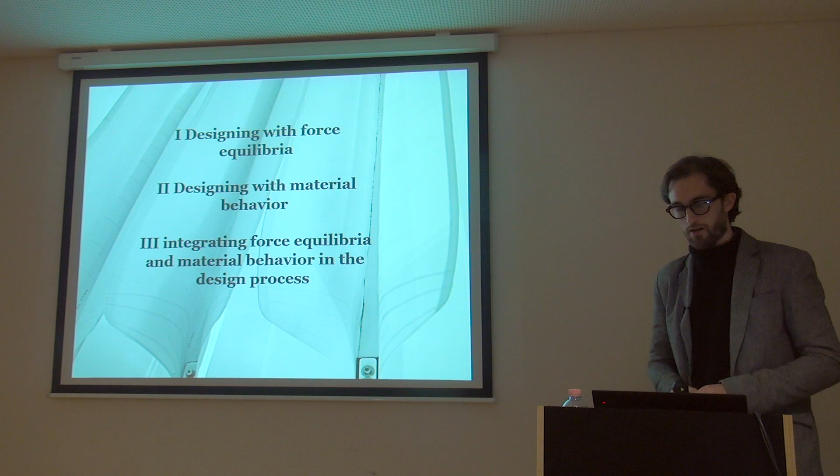And I'm going to divide it up a little bit into different ways that we approached the projects. Not so much in a chronological way, but much more in the way we approach the first design ideas and the way we try to develop an engineering system out of an initial design intention, and then let that become a structural system with some degree of efficiency.

So the first family of structures I want to talk about is very much related actually to the work that the IL and the team around Frei Otto was pushing as of the late 60s and was publishing in their many IL publications, which was often very much driven by a structural idea and how the physics of the problem can become form, and how that form then dictates the entire design of the system.

The first big project I was involved in at Bodo Rasch's office was the structural design of these famous Medina umbrellas. And we were one small unit as structural engineers in a very big design team, all working together on making this mechanical system work in an architectural context set in Saudi Arabia, having it work as a machine because it's a folding kinematic system, having it work structurally in the extremely high winds, and going into a dialogue where there were parts of it very mechanical, designing the kinematics of the system.

Other parts were heavily dealing with computation, where we tried to understand the real physics of the problem, as we were forced to design a system at a very high efficiency with very slender cross-sections. Because if you try to build a structure that's kinematic and folding, it's not just beautiful and nice to build it light, it's actually something that you have to achieve in order to make a package that can fold to a very small size. Because tube size, as for these cantilever arms, would be something that's very hindering as you're folding it.

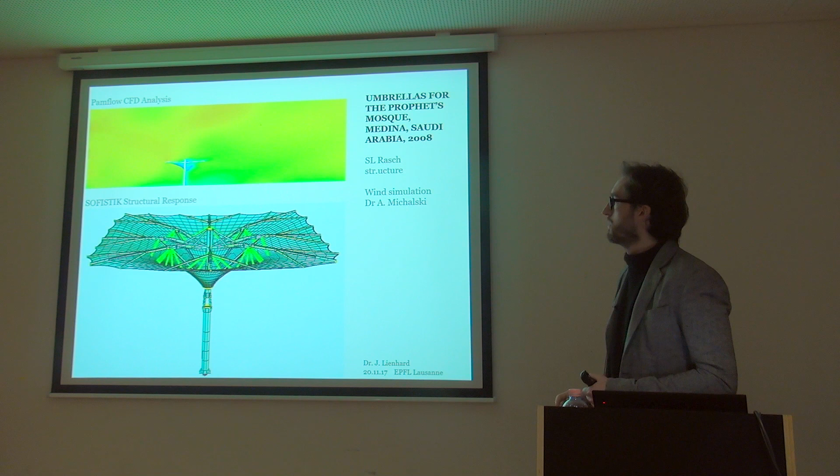And at the same time, as you can see here, the structure is actually moving in the wind, and there's some aeroelastic damping involved, and there's additional dynamic problems which we will not see in a wind tunnel. So in this case, and it's a fairly unique case, we actually need the computational wind tunnel with natural winds coming in and not laminar winds to analyze the structure in its true behavior, to then finally achieve something that is very lightweight and very thin in the cross sections, so we can fold it into a small package.

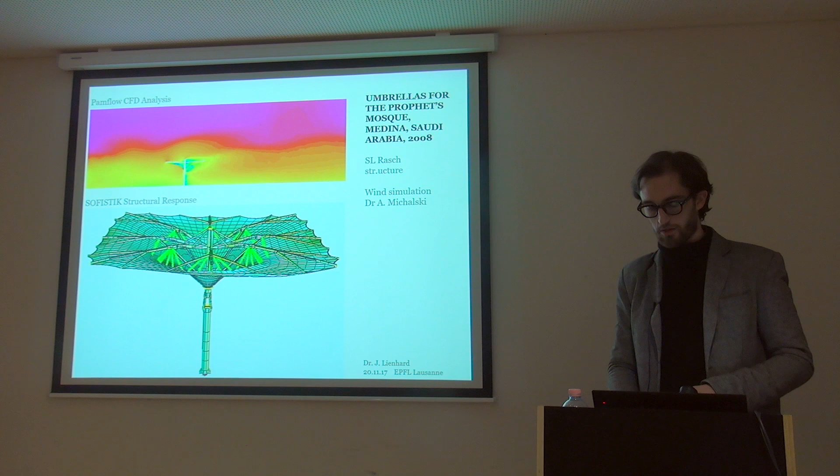There's obviously many things one can talk about with these systems. I'm just going to focus on one very small part, which actually kind of talks a little bit about this dialogue, where you try to make a very efficient design that's also informed by the structure.

So we're going to just focus on the edge of the membrane and see how there's these central arms and there's the large diagonal arms, and you can see how there's always these smaller arms that are attached to these main arms. We call these passive arms because they're not directly connected to the central driving system, and they just passively fold out as the umbrella unfolds.

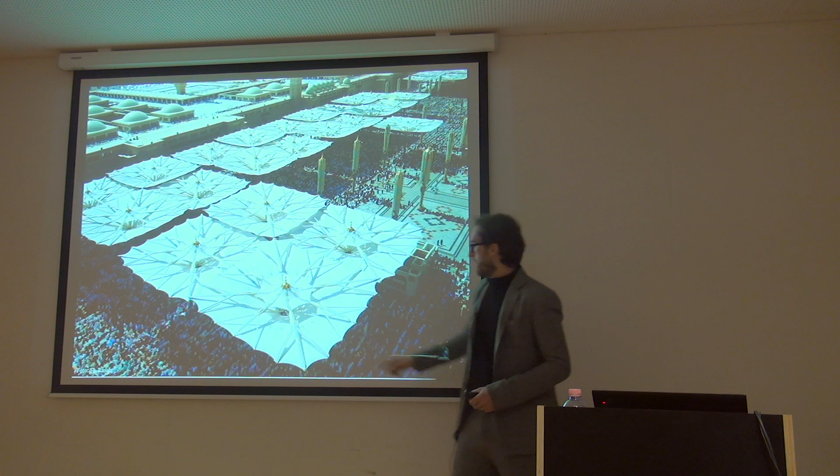And to do so, they're hinged here, which then means if they're attached to the membrane here, we have to make sure that the normal force that the membrane puts into the end of the arm has to be perfectly directed into this arm, so it finds a local equilibrium here. And if you look carefully, you will notice that the edge of the membrane, the curvature actually changes. So there's a structural information that's not hidden inside the shape of the membrane, but that's actually quite visible.

And you can see how the edge cable curvature actually decides on how big the force is in that edge cable, and how this radius is much smaller, which leads to a smaller force. And then this is something that I'm sure all the architecture students here learn a lot about, the force equilibrium, and you can then see when you add up these force vectors how you're perfectly pointing in the direction of the arm.

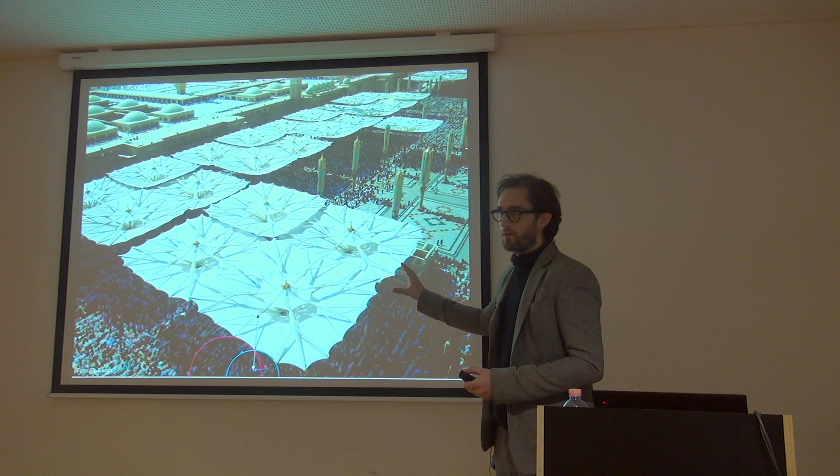And this is actually something that is very much in the DNA of all this work, that there's an information about the force equilibria that's inherent to this entire structural system, and that becomes visible if you carefully look at the shape of the system.

So basically, if you break it down into the theory, you can see how adding up the force vectors at the edge of the membrane, you can dictate its direction. And then by playing with different radii on the edge, you can control where the forces are going. And this is something we cannot hide. And this is something we never wanted to hide, because we were very much enjoying this dialogue between creating a shape that works in terms of a shading system, but also structurally.

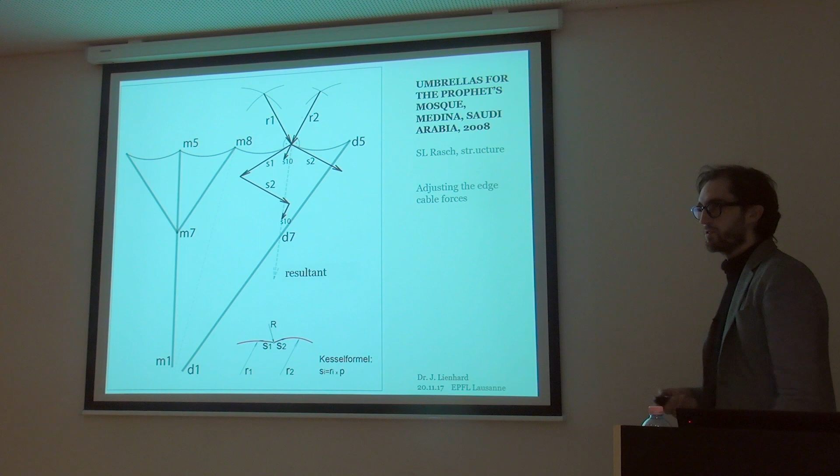And this is a kind of approach to work which happened inside Bodo Rasch's architecture office, where people were actually sitting together in one place at one table working together, which made this approach possible.

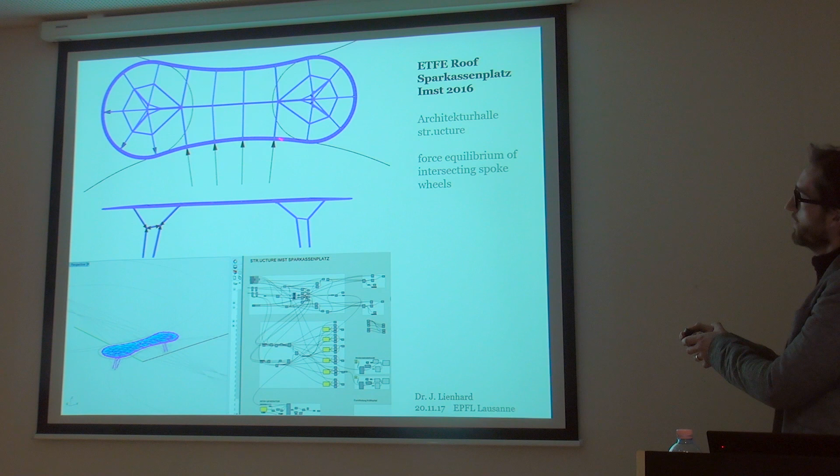First of all, again, we started by equilibrating the geometry through a very basic force principle by designing the floor plan in 4 intersecting spoke wheels. So you can imagine that these are 4 independent circles that meet at their tangents, and we aligned the entire inner structural system with the radii of these circles.

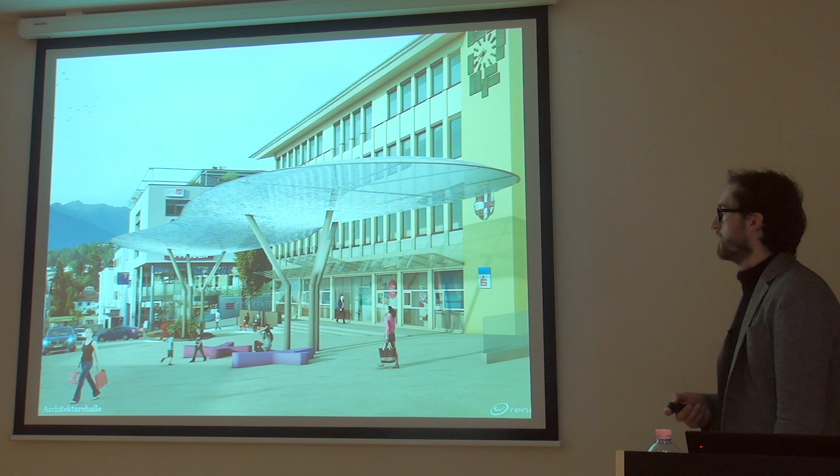Very basic principle, which you can then set into a parametric model. And at the same time, these bifurcated masts were also based on a force equilibrium. And so we had started the design by designing a force system, which we could then hand back to the architect, who then designed the structure in itself by simply changing the radii and the heights of the bifurcation points in the system. And we knew whatever we would get back is something that's somewhat structurally informed and will lead to a primary steel structure which should be fairly sound and stable.

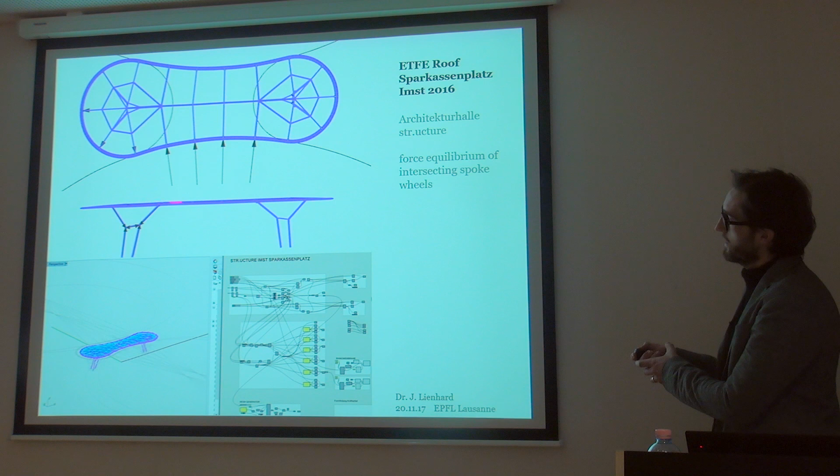What you can also see is that in section, the structure is flat on the underside and slightly elevated towards the center. So our idea was that we build a structure that passes through different phases. So we have these ETFE cushions that are additionally supported by a cable net. And then on the inside of the structure, on top of this elevation, we put an additional cable net, so we can allow for controlled collapse of the cushion, and it's still at an angle to the outside and can still drain water to the outside. So we expect this cushion to collapse and sit on this inner cable net.

So you can see here a multi-layer system. We have the lower cable net, ETFE cushion, that bifurcated inner steel structure, a cable net that carries the high snow loads in winter, and then the ETFE on top and another cable net. So it becomes a kind of hybrid system that goes through different phases.

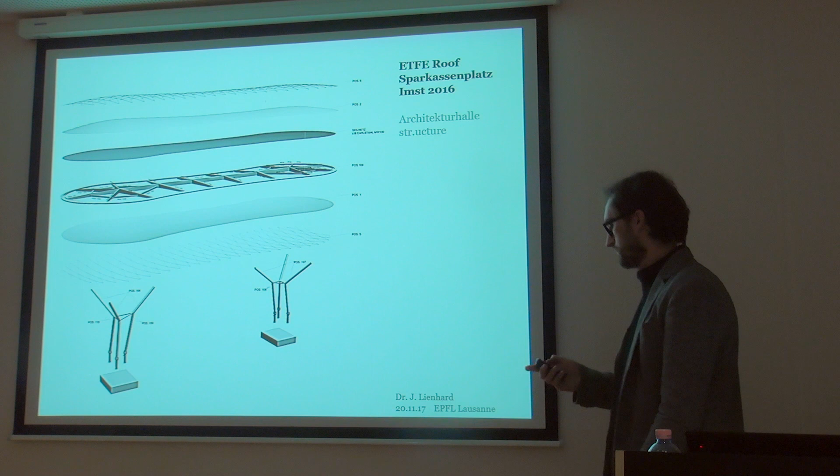A result of designing the geometry totally based on forces is that at the point where you then have to detail it, you're obviously also looking at a system that doesn't perfectly match in right angles, but that has maybe some very odd geometries that you have to resolve. And rather than seeing this as a problem, we actually defined this as the main challenge of the system, where we wanted to really show that everything is aligned to the tangents and to the flows of forces.

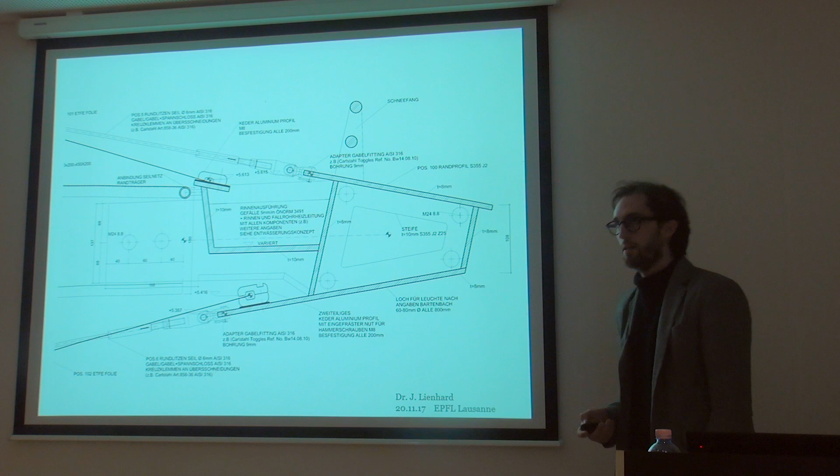So we designed the edge girder in a way that it picked up the resultant directions of the cable net and had an integrated rain gutter system in it, which then drained through the inside of the cushion. We wanted to have no air ducts or water pipes seen on the outside. So that created the next challenge, that the bifurcation points of the central masts had to remain hollow so we can run all the tubes through it, which we then realized with these steel cast nodes.

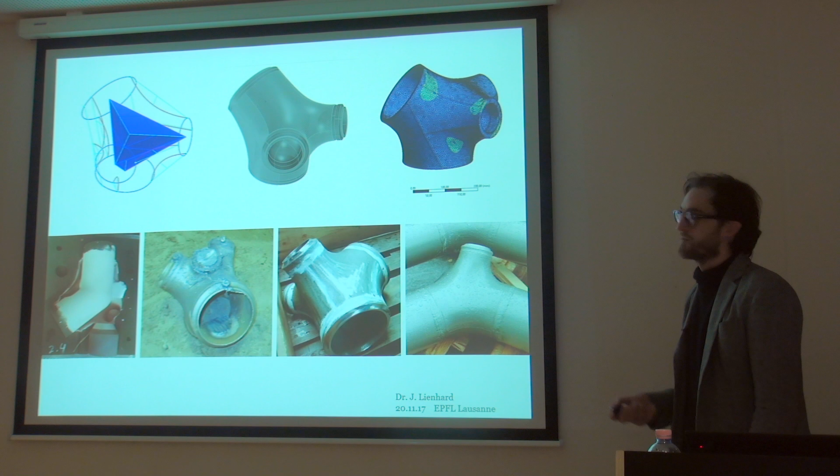Something very interesting is that actually it's fairly inexpensive to build these steel cast nodes nowadays, because we can 3D print and sand the casting molds for it. And actually the most expensive thing for us was to design a perfect surface of these elements and to design the 3D solid model that then goes into the 3D printer. What happens afterwards is actually fairly standardized steel procedures, and they don't care whether they get 6 different nodes or 6 of the same nodes, because they anyway have to reprint the molds every time.

Something that we often aim for, and this is really much the Stuttgart engineering school, is that in the details of the structure, we always try to make things look as minimal and as obvious as possible. So the way we judge our structural systems and the way these are constructed is that we don't want to look at the structure and have our attention drawn to a detail, but we rather want to look at it and have everything seemingly obvious.

So you can see that the steel cast node actually looks like the most obvious way of bifurcating this steel node, whereas the most standard way would have been a bolted connection with bolts on the outside and stiffener plates, where certainly the eye would have gotten stuck on seeing that bit of technical detail on that structure. The structure has a total span of 35 meters and covers this central plaza now.

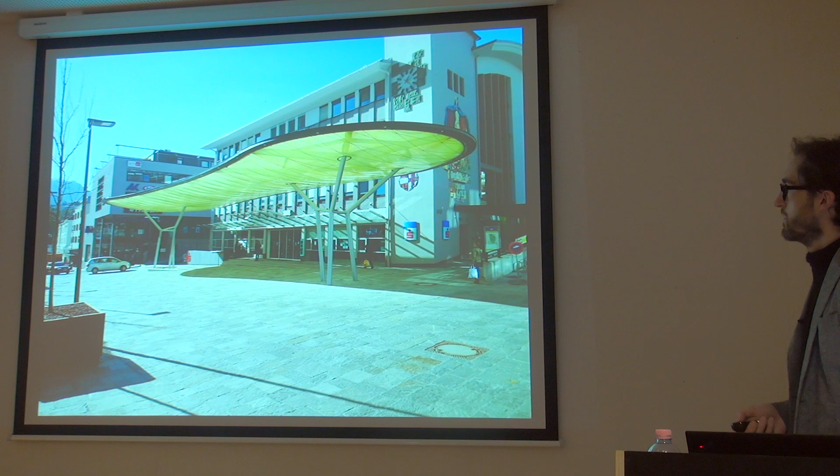Something that we were very involved with at the ITKE at the University of Stuttgart is using material behavior as a design driver. So not starting with the design in itself and finding a structural answer to it, where maybe we can align some forces with an initial design idea and then develop off of that a variation of the initial design, but rather look at material properties as they are and see what can come out of that.

One of the first projects that we did like this was the class we called Bend It, and had a collection of students together with the ITKE of Professor Jan Knippers and Achim Menges, who had just joined the university. Actually, at the time, one of the PhDs was Christoph Robeller, who was at the IBOIS until very recently. And the idea for the course was that we just gave a whole bunch of students strips of timber veneer, and we had them play with it and find out how it reacts to bending and what kind of equilibrium shapes we can create from that.

We started the design class by visiting Frei Otto's famous Multihalle in Mannheim, and then had the chance to actually visit him in his atelier in Warmbronn, and had a very long discussion about how risky it might be to solely rely on material behavior to create shape. This was quite an eye-opener for us, because for most of us we see Frei Otto's work as very ambitious and in a way maybe risky if you look at the 64-meter span central hall of the Multihalle Mannheim.

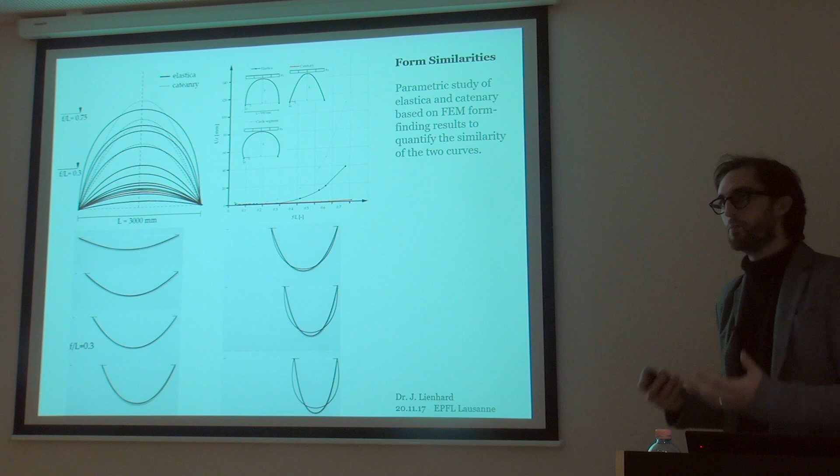The problem is that jumping from here, from a simple paper model, which actually shows a very complex behavior, into something that you can draw in a CAD system and define analytically, is a very big challenge. Because the only bit of maths that we have to understand the shape of these so-called elastica curves is fairly complex and only can be applied to 2D problems and mainly only Euler's 4 buckling modes. So we were interested in actually finding systems that behave similar. And from that talk to Frei Otto, we'd understood that there's a similarity between the hanging chain, the catenary, and the bending curve of the elastica.

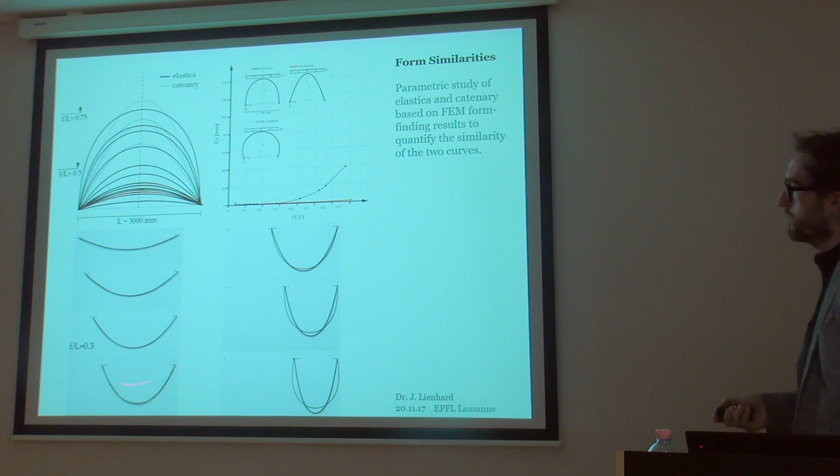And we built this model of a carbon rod and a bicycle chain. And you can see up to a rise to span ratio of about 30% that they pretty much describe exactly the same parabola. And it's only at a higher rise to span ratio where you then see the hanging chain remaining in that perfect parabola shape, and the elastica curve slowly bulges out. And you can also see at the force deflection diagram how that 30% is also the moment where the elastica becomes much less efficient as an arch, whilst the catenary remains a very efficient arch system. So there's actually structurally no reason to go beyond this shape in terms of a functioning arch system.

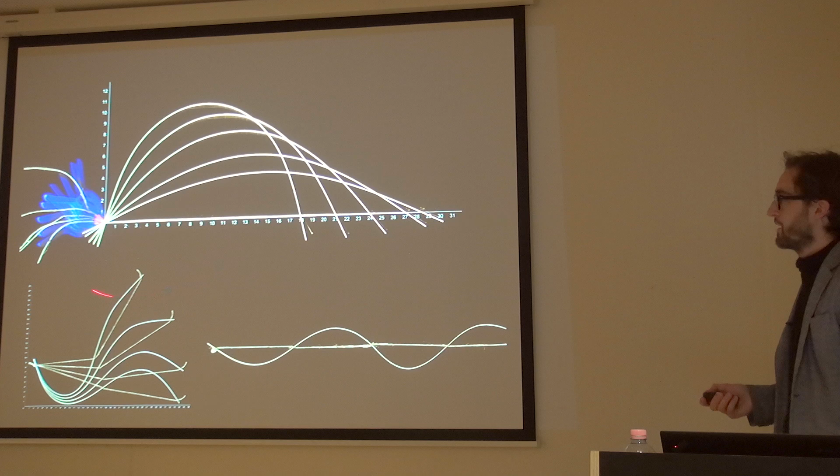So what the students did is they built a whole load of models and tried to analyze them in terms of their behavior to find out what kind of equilibrium systems they could find, and then to translate that into similarity models which they can easily script. Because it would be very complex to script the elastica curve into a parametric model, whilst understanding the basic shape of that parabola. Understanding the rise to span ratios is something that you can easily translate into a spline definition, and then actually show some complexity in the behavior that is precise enough for the initial design of the system,

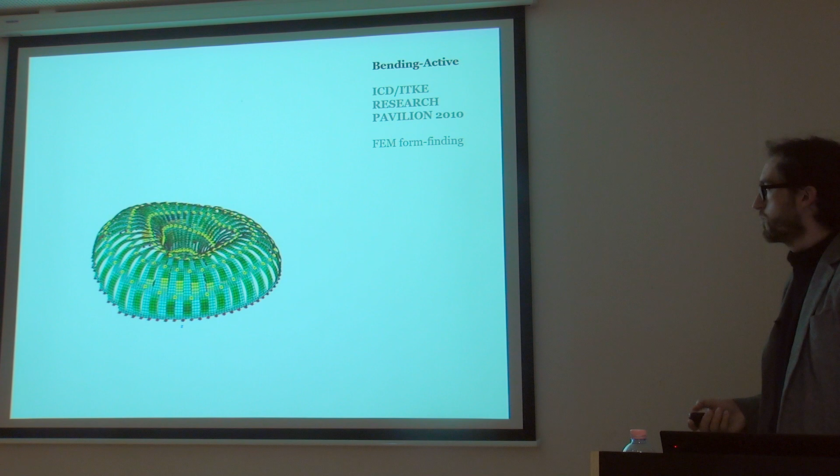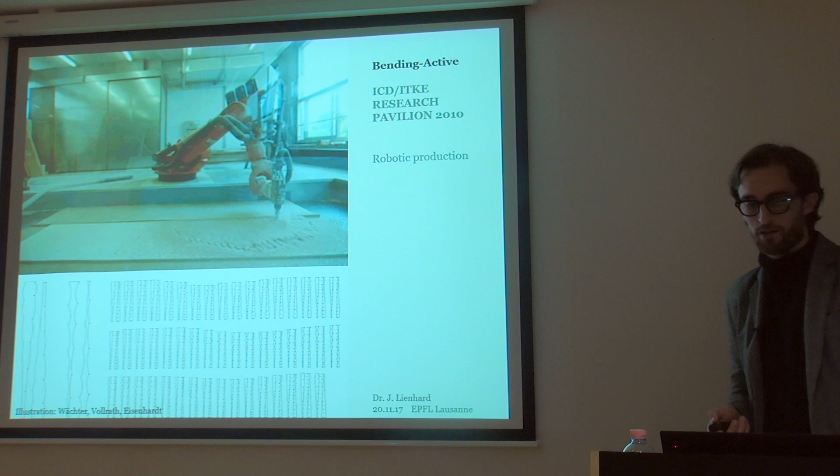which was then fed as an input model into the actual structural analysis, which would then perfectly define the actual shape of the system. Here simulated in FEM, where the entire erection process was re-simulated. So this then became actually the model that really described the geometry. And that also then, from that central script, was the output for the entire production data. This was the first time this robot was used at the University of Stuttgart. So obviously for just 2D cutting, one could have used another tool, but as we'd only just gotten the robot, that was the first action it could be showing.

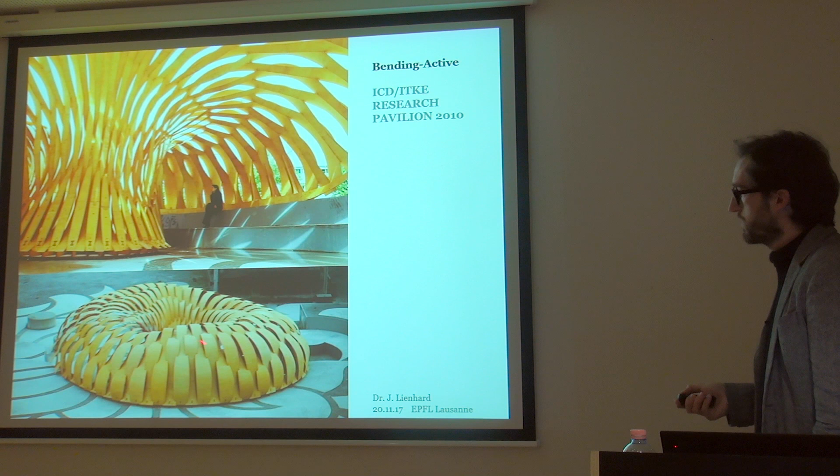And this is then the final design, where you can then see also how the system was structurally informed, because you can understand that at the intersection point of these two arches, the structural height is close to 0. So actually we're building a system that's composed of many, many hinges, which would mean if they were all on the same line, it would collapse. And by shifting the lines of hinges across that surface, it becomes a stable structure.

With myself coming from a background of membrane structure, I was very intrigued to find out how we can translate this approach by bending elements and relying on their elastic behavior into a system that also interacts as a hybrid with structural membranes. In this case, we were approached by a person from Western France, near Tours, who had in his backyard an old ruined structure, apparently designed by Leonardo da Vinci, and he wanted a very lightweight structure that doesn't harm the existing walls.

So we had this idea that we can build these spring-loaded beams that just jam into the courtyards of the structure without having to bolt them into it, and then add a roof structure to it. The design approach here was that basically we just took all the students, a whole bunch of glass fiber rods, went on site and built one-to-one scale models by just understanding how shapes can be created in this kind of spring-loaded system which jams essentially into this little courtyard.

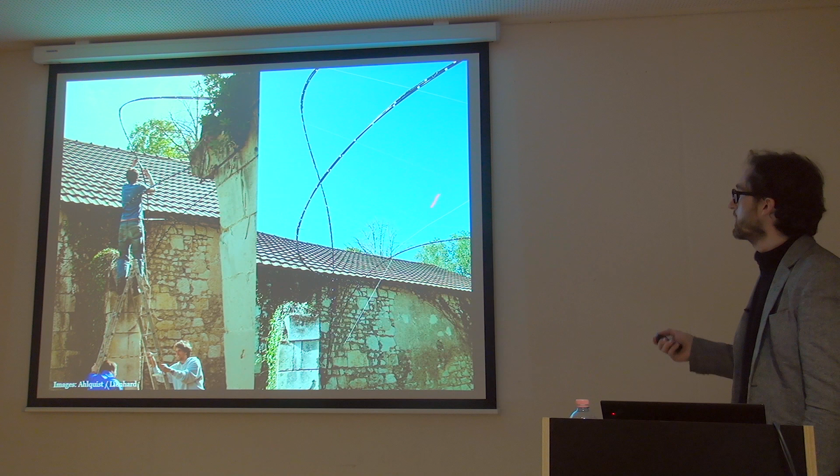And this is actually also very nicely showing how cheap it is in a way to use this approach of elastic bending to create complex shape, because the shape gets created by the equilibrium of the support reactions and the elastic behavior of these rods. And we were mimicking the membrane with a very simple cable net system to understand what we could build.

Coming back to Stuttgart, the students again built many, many models, breaking it down into a kind of system that translates into a rule. The rule at the end was that we had 3 points of support with looped GFRP rods into it, and they were all folded on top of each other to create a structural system.

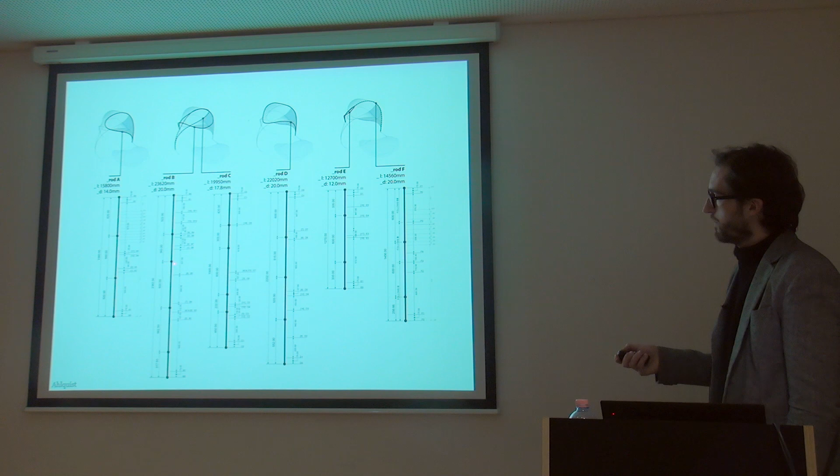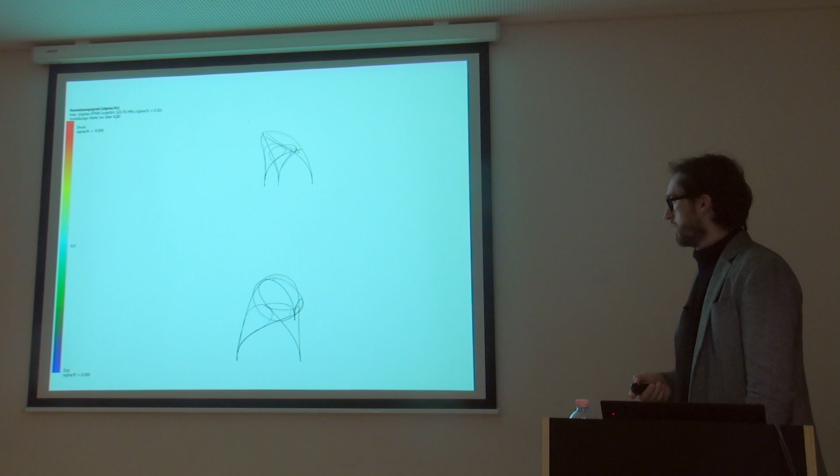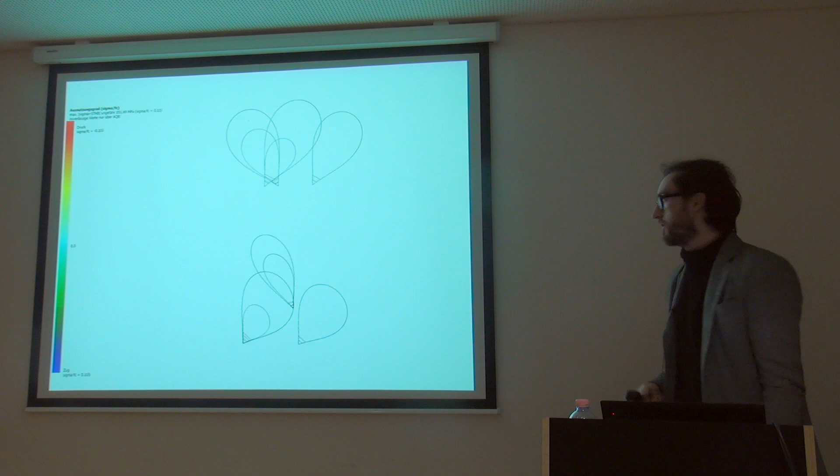And we then took this information from the model to unroll each of the beams and track the points of their intersection, which could then be translated into a structural model where all the lines of intersection were gradually reconnected by elastic cable elements to re-erect the structure and actually find out its true three-dimensional shape. At the end of that form finding process, a membrane surface is added to the glass fiber rods to then give another force that sits in the system and then additionally deforms the entire structure.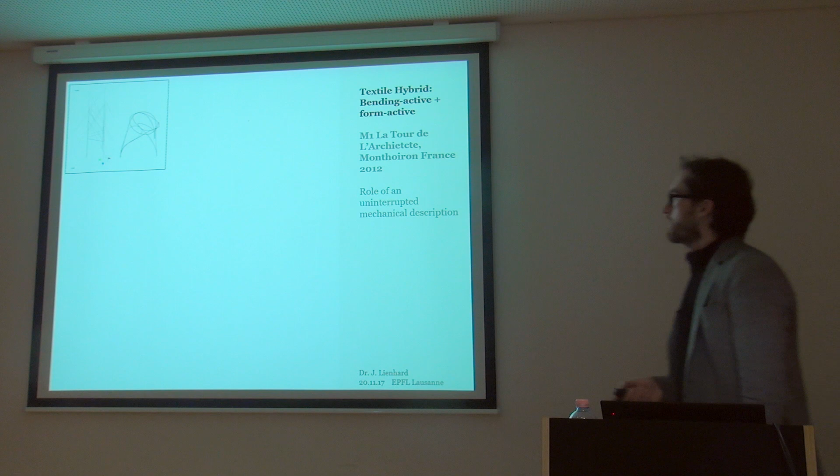So what happened here is that we made an FEM simulation, which at the end of the day became a kind of central information model, because the only bit of 3D modeling that we had that could truly describe the system was based on this FEM model, which actually is a major challenge, because FEM is very good for simulating these systems, but it's not at all a design tool.

So the simulation that you just saw is a highly sped up simulation. The total time for form finding would take up to 2 hours on a computer. So it's not something that you can interact with as a design tool. It's because of this that we actually relied on a lot of model building and then very late go onto the computer. Recently, there's been many developments that made computation of these systems faster, mainly based on particle spring systems, integrated into software like Kangaroo or Springform, and that then make this first approach faster.

But still, we will always face the challenge that if we as an engineer pick up this work, we will have to go back to zero to re-simulate the entire process of building the structure, so we understand the internal stresses of the system. We cannot just pick up the geometry of someone who's simulated it maybe in Grasshopper and say, great, I'll take that as my engineering model, because then I don't know what are the forces inside the structure that are a result of the erection process.

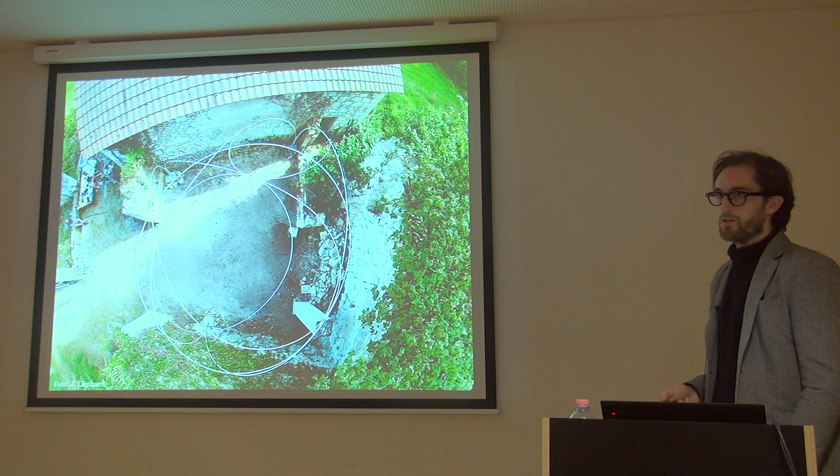These are some images of how we set it up. Some of these rods are almost 40 meters long in total length. So a big challenge is actually getting them through that little entrance into that tiny little courtyard without breaking them. Because the minimum bending radius that we could allow is actually the one that's in its final position, and we had to be very careful to not bend them further as we're erecting the system.

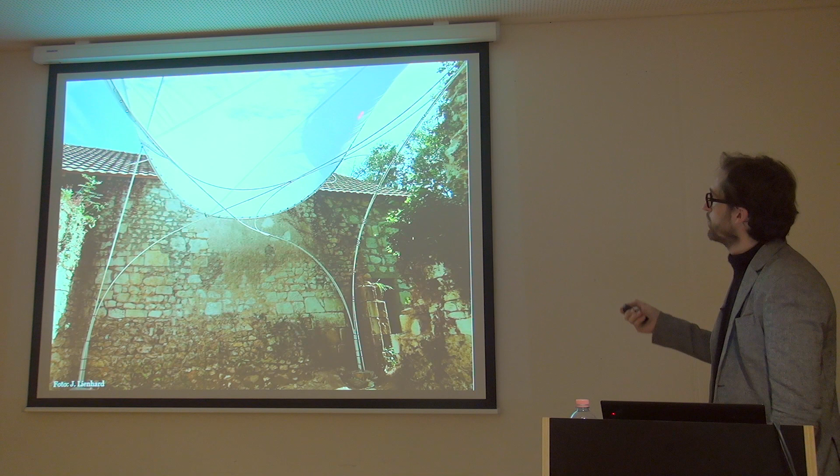The most interesting moment always when you build a membrane structure is when you're pre-stressing the membrane, because without having to measure it, if the membrane is without wrinkles, you know that you've pretty much hit it right. In this case, at least this section of the membrane was really nicely pre-stressed, and we're very happy to see how this rod here actually gets pulled up into the air by the membrane pre-stress.

The entire system still faced some challenges around the edges because of the differences in stiffness of kind of standard membrane details in contrast to the very elastic system that we were building it on. You can see that it was eventually composed into a multi-layer system with a solid polyester PVC membrane on top. Then we had these tiny little textile hybrid springs in between that would create a space on the inside of the structure. And then the lower side was clad with a mesh membrane to show the inside of it. And so it became a multi-layer system which generated the appropriate stiffness for the roof.

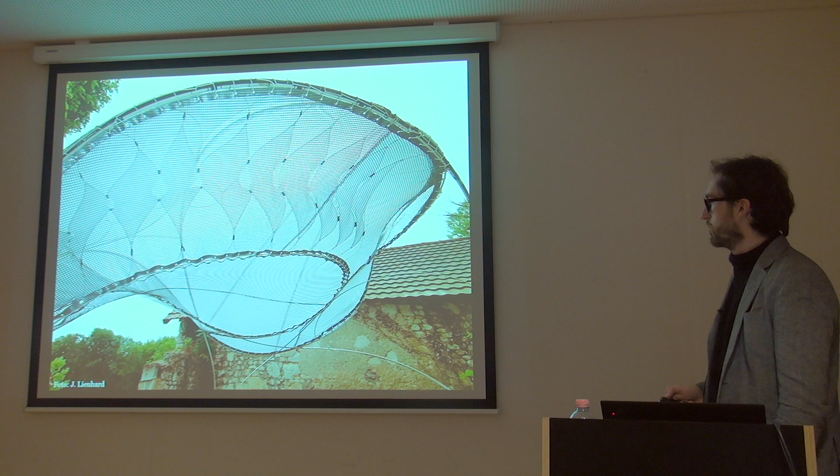As part of my ongoing research at the ITKE in Stuttgart, we investigated how these bending systems can actually be used for kinematics without hinges. Because if you imagine that all of these structures, which I just showed, solidly rely on their elastic deformation behavior, and you use materials like glass fiber reinforced plastics, which have a very low creep in comparison to timber, you can also imagine that you can use this process of erection as a repetitive process and create a kinematic or adaptive system out of it.

The research project was done in a collaboration with biologists from the University of Freiburg and some material scientists from Denkendorf. And the biologists predominantly analyzed plant movements because they knew that a lot of plants, as they open and blossom or even just move their leaves, they all rely on elastic deformation rather than discrete hinges. So we went through a very long phase in the beginning of the project by just scanning plant movements and building very simple initial models to understand the underlying mechanism.

The plant that we got stuck on was this one, the Strelitzia reginae, or bird of paradise plant. And that was the very first model that we built, where we saw that if we have these cantilevering little arms and we add a fin to it, that as we're bending down the arm, the fin folds to the side. If you look at the plant itself, you can see how this mechanism is happening.

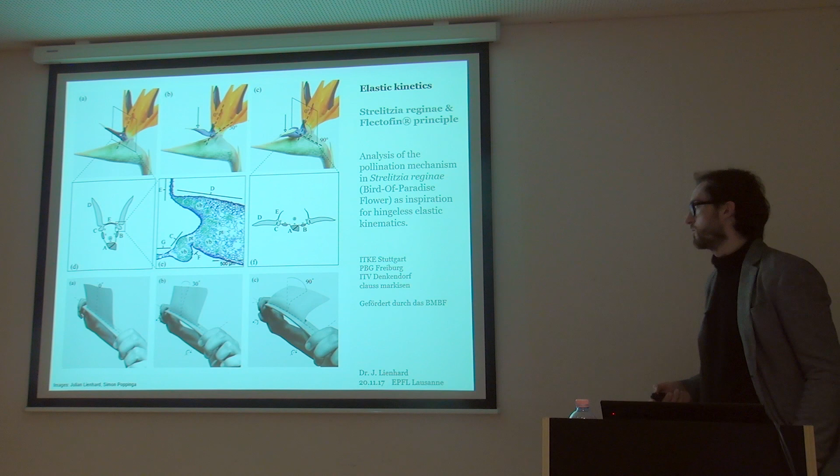And what we usually learn when we design bridges is that actually when you have 4 hinges in a line as you're reinforcing this bridge with a cable system, that as you load it with weight it will swing to the side, whereas if you have that eccentricity in it, it'll be a stable structure.

So this is actually something that we had at our institute and that we teach architects in the first semester. And it took us a while to realize that this is actually what the plant does. And it doesn't have a perfect hinge here, but it has an elastic zone, and that is what creates the mechanism.

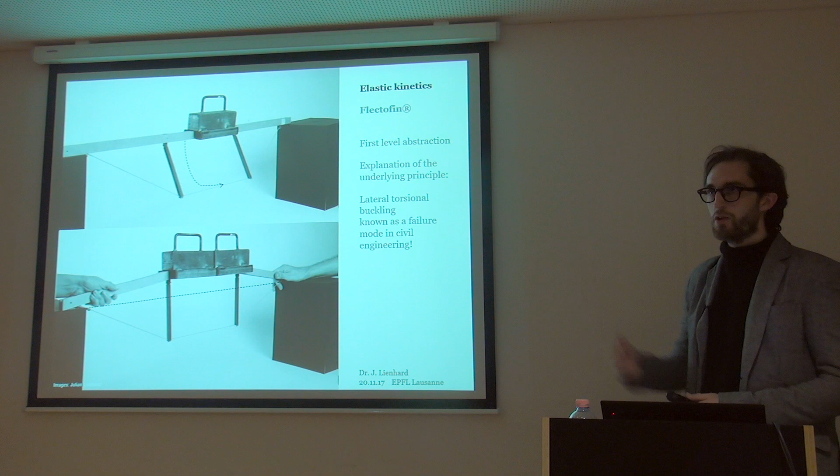So in hindsight, when we look at this research in biomimicry, we often find that it's not so much the very specific solution that we find in a natural system which directly translates into a technical answer, but it's more the inspirations that happen on the way and the way that you learn to rethink the way you're educated or the way that you approach to solve a problem.

If you look at the detail of the system, you can also imagine that as we're folding this fin you will find very high notch stresses at this point, which is a question that you can return to biologists because the plant must have solved that problem. And the biologists actually know many answers to how there's elastic large areal elements connecting to a stiffer linear element, and you find that in every leaf.

And there's actually been a lot of work done on understanding the geometry of this leaf by Mattheck, the so-called tension triangles. And we were very surprised to actually see it applied to our system and how the tension triangles largely reduce the notch stresses on the corner here.

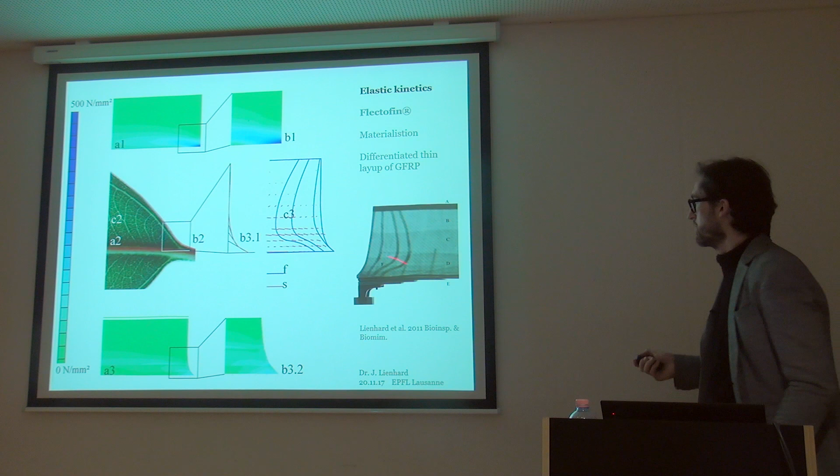You can also see how this is a gradient material setup now in glass fiber reinforced plastic. And so it's a very bespoke material layout to the specific problem and the specific size of this lamella, which then creates this folding mechanism. This is one of the many FEM simulations that we did to understand the ideal material layout for the system, and then some prototypes that were built during the project.

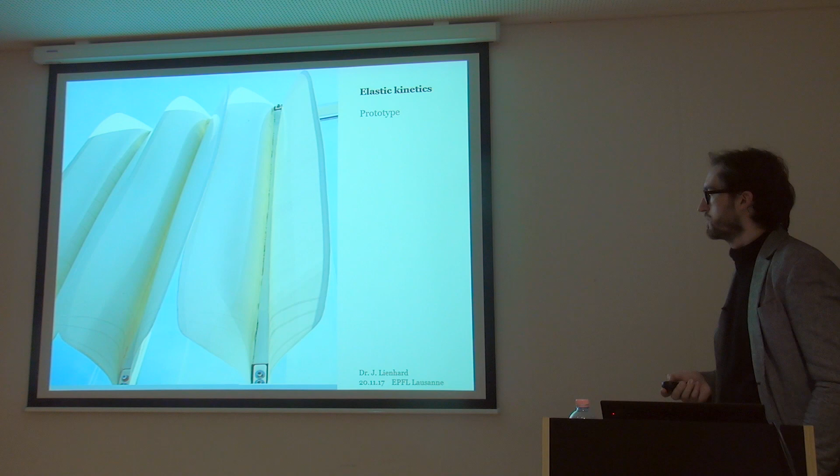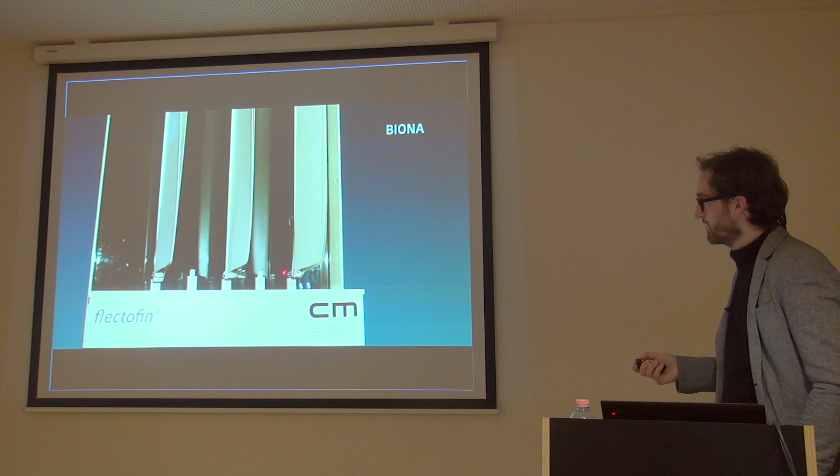These first prototypes were actuated by eccentric pistons that sit on the back and actually a tiny little hinge that sits back here. This project has been ongoing at the ITKE. Very recently there was a bionic exhibition opened in Stuttgart, so anyone who comes to Stuttgart should take the time to visit that, where now they have actuated these systems with pneumatic tubes that sit on the back to actually cancel that last hinge that we still had in our system.

So the last section of types of projects I want to talk about is those where this material information and the force information actually come together, sometimes actually only at a very specific detail of a project, but it can maybe show you a little bit how some of these projects, which may be very research-based and sometimes even very far away from practice, the lessons learned from this work can very specifically inform day-to-day problems that we find in practice.

Before going into the practical examples, I still want to show you this structure that we built with students last year at the University of Hamburg. In Hamburg, I had the chance to have a student group of 8 architects and 8 engineers that were both joining the same course. And from the projects I'd done in Stuttgart, I'd always understood that it's actually quite a big challenge having a large group of students working on one specific equilibrium system.

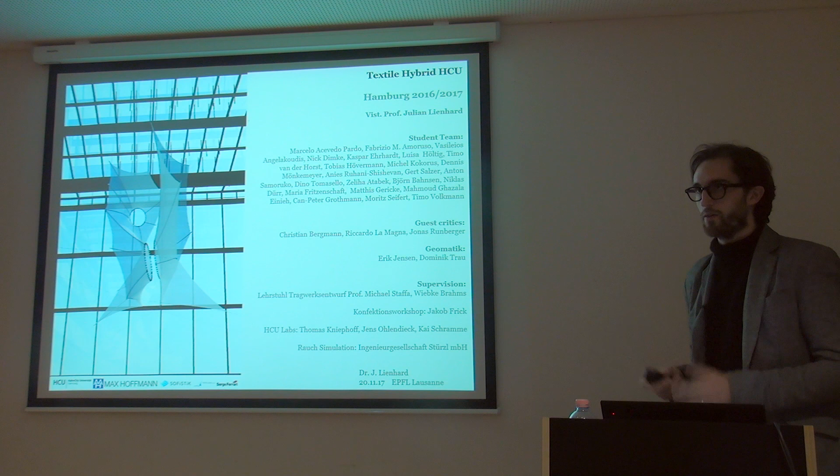We always had in our projects in Stuttgart, at the end of the day, a team of 1 or 2 students who were solely responsible for the computational model. And then there was a whole bunch of students organized around them who were more involved with material testing or with the organizational parts or the building parts of it. But it often came down to just very few students and individuals who were controlling the design system. And I wanted to face this challenge with the students in Hamburg and set up a way that we can all work together into one information model.

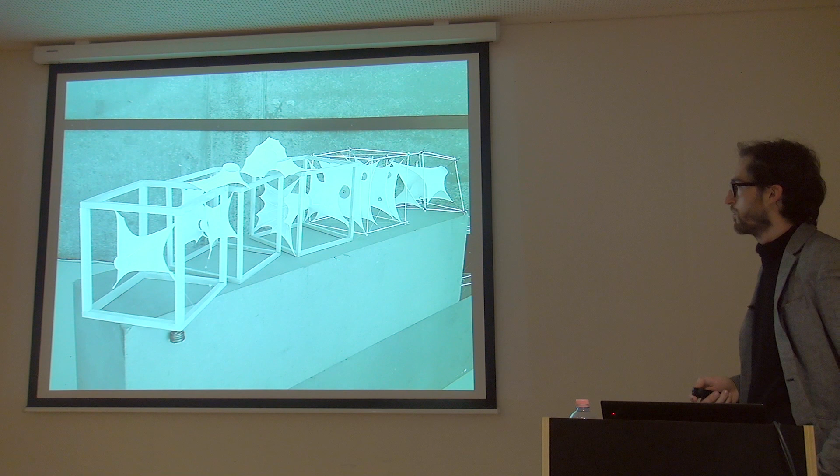Again, we started by building models, just understanding basic equilibrium systems that you can set up between elastically bent glass fiber rods and pre-stressed membranes. Out of these many models, they slowly started designing structural systems which were meant to hang in the main entrance hall of the university. Then we had a little internal competition, and we democratically decided to build one of these suggested systems.

And then a large focus of the project was actually setting up a design system where the entire computational information model is based on a cloud. And we set up several expertise groups around that model where we had structural engineers, people doing details, people doing the form finding of the system, people doing the whole project management, which were connecting to the system with Excel. So we could all work off of one central information model and not have one single person being responsible for it, but rather the entire group of students.

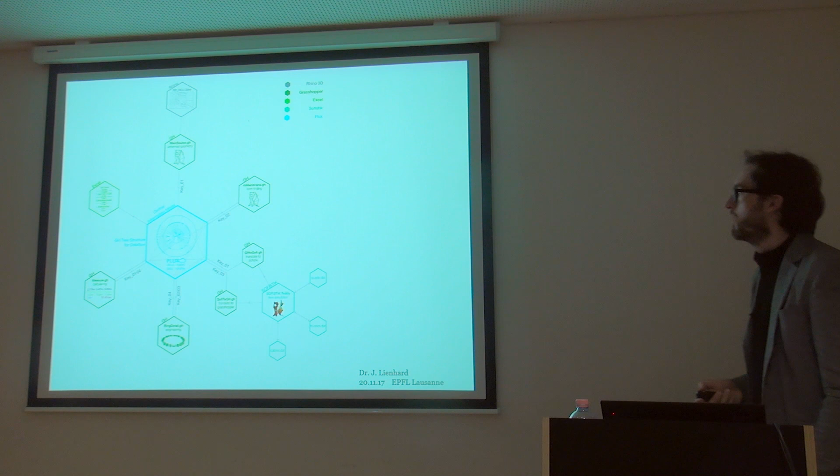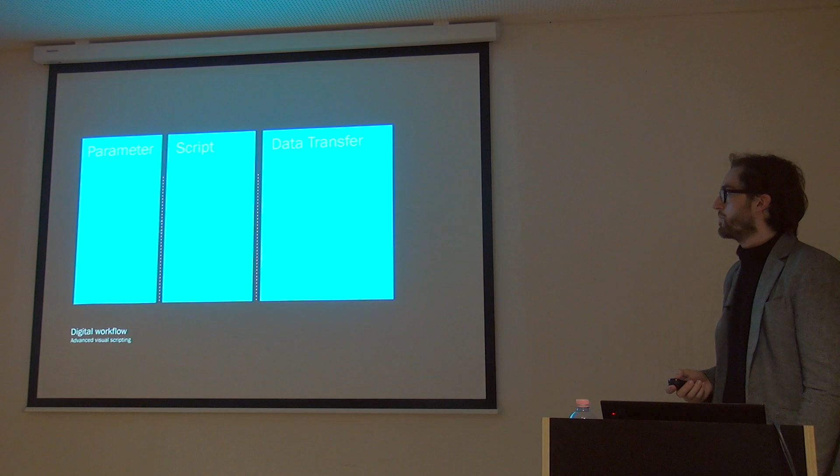This meant that we had to have a central tree structure that held all the information, and we had to very carefully version our problem. At the end of the day, this meant though that we could actually all work in parallel, and whilst the structural engineers were still optimizing the system in its form finding, the people doing the detail could work on an earlier version of the structure and already parametrically design the details of the system.

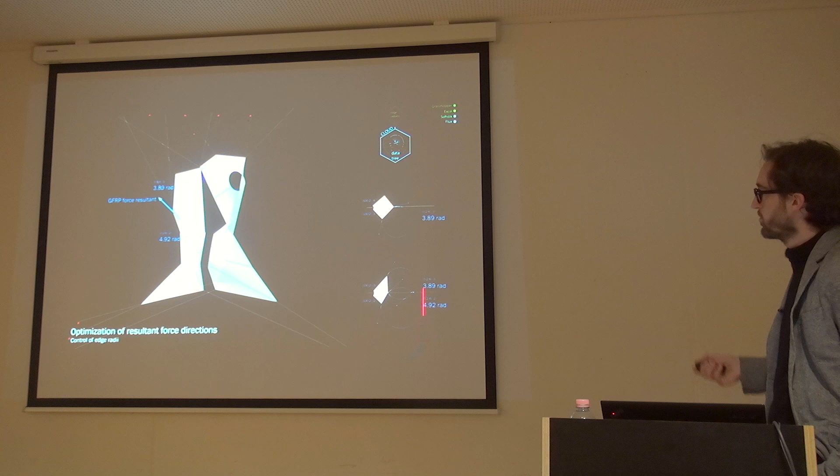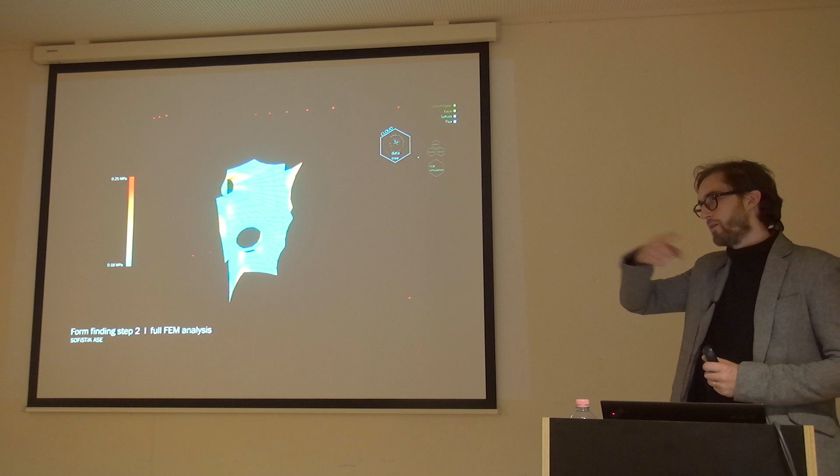One central problem again was that of organizing the resultant forces in the system. So this is exactly the same problem that we resolved on the Medina umbrellas, but in a much more 3D problem, because we only had very precise points on the ceiling of the roof and on the sides of the building where we could anchor our system to. So we had to make sure that wherever the cables are going, they're perfectly in the resultant direction of the structural system itself. So part of that optimization was organizing the resultant force directions off of that central model, which then again was informed by multiple material tests.

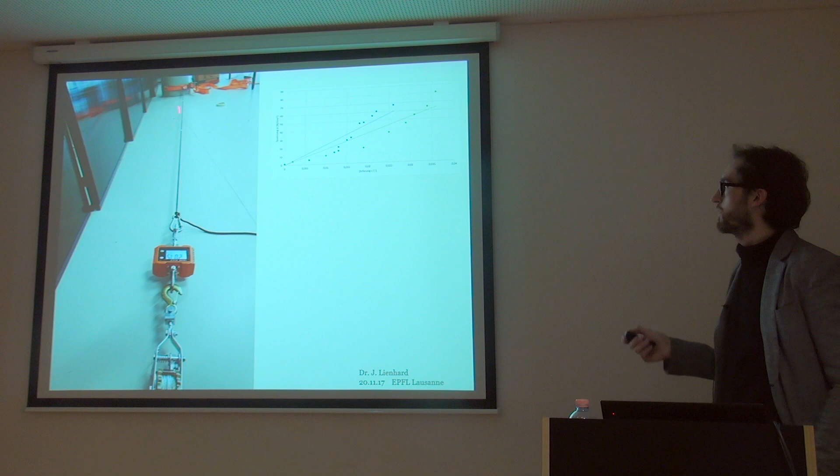We were hanging the structure of Dyneema ropes, which was the stiffest and lightest that we could get, but still it has some elasticity. And because we could only erect the structure from the side by pulling it from the sides, we had to carefully mark the cables and show exactly how far we have to pull them to find the final geometry. And so we needed that bit of information.

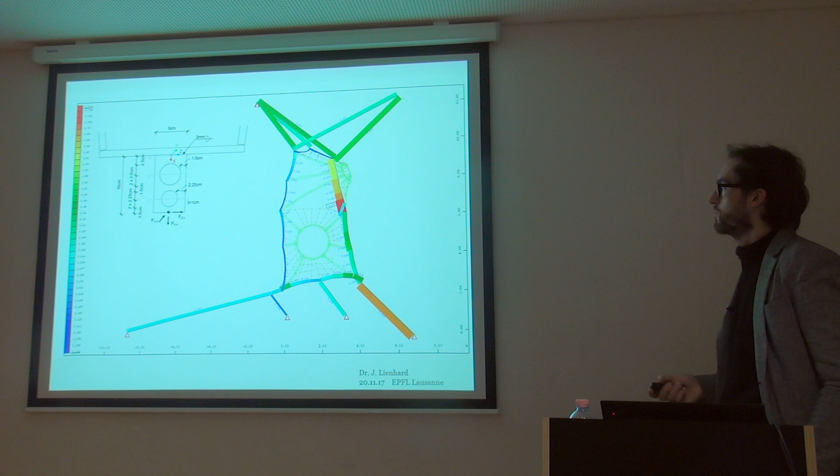At the end of the day, interestingly, again, the main design driver was the fire system. So we connected to one of these connection plates where the sprinkler system is set, and that actually was totally minimizing the amount of force that we could attach to the ceiling. So many design iterations went over changing the angles, changing the size, changing the overall pre-stress in the system until we could reach a system where the maximum load, also with a little bit of wind on it, on the inside of the building, would not exceed the capacity of this connection.

Very exciting is when you work with architects and engineers together that you really can define these expert groups. So we went quite far also into material testing to understand the exact elastic behavior of these glass fiber rods. But then again, sadly, and this is also very true to these university problems, you can analyze everything, but at the end of the day, when we ordered the rods, they sent us the wrong ones. So this was a little bit besides the point to do all this testing. But I guess that's also the reality of these kind of projects, which are certainly also present in day-to-day practice.

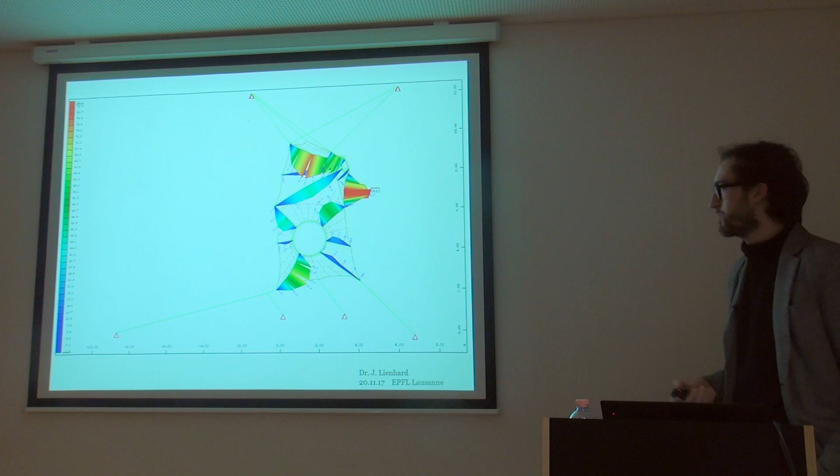One of the biggest challenges in this entire project again came from the fire rating, because we were in the main entrance hall of this building, and we had to use an A1 class membrane material, which essentially doesn't exist. So all we could use is pure glass fiber without any coating on it, which is a major challenge for a membrane structure because it has essentially no stretch at all. And if you pre-stress a membrane, you actually quite like to have a bit of compensation in it and pull some stress out of it.

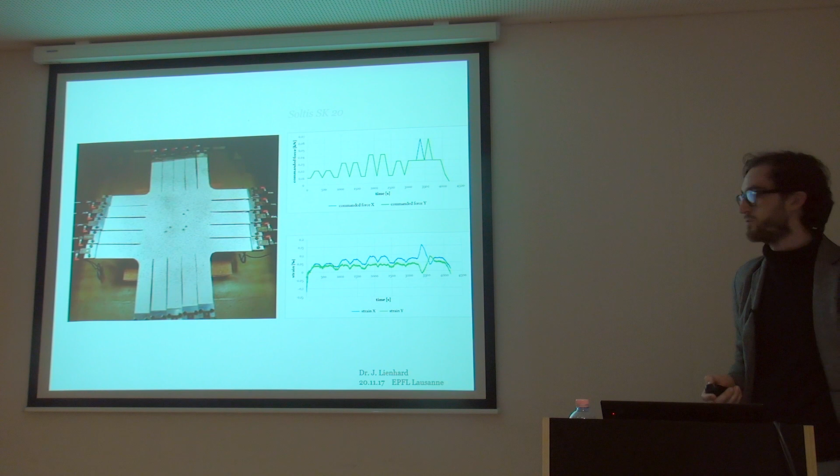First of all, the geometric inaccuracies that you have from the production process and from not perfectly controlling the boundary conditions are overcome by the amount of pre-stress that you put into the system, and then obviously also change in temperature, change in elongation of the cable system would not have such a big impact on the total pre-stress of the structure. So whoever was in Hamburg would have probably also seen that the final system as we built it did not reach that goal of a perfectly wrinkle-free membrane, which was mainly the challenge of the pure glass fiber material.

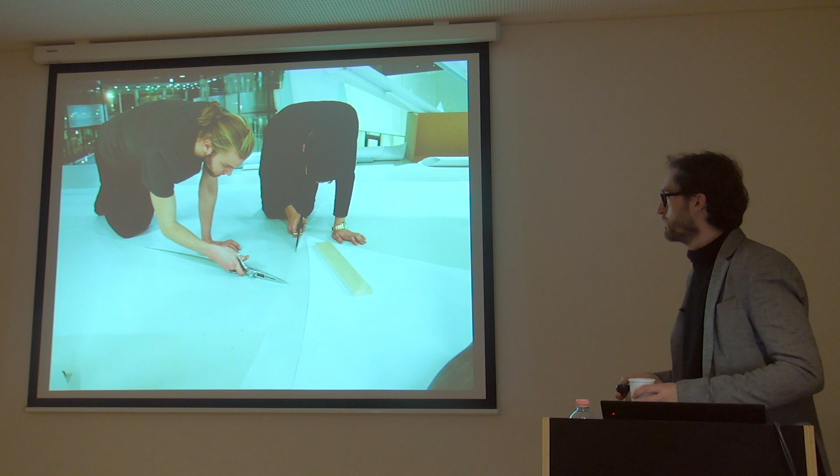The material was so challenging that the initial company who was going to produce the membrane for us simply refused to manufacture it, because they said you cannot sew this material. But we were so far into the project that we said we have to do it anyway. So we hijacked the model builder from SL Rasch, who came up to Hamburg, and then we sewed the membrane all together with the students. Which actually at the end of the day was a very nice part of the project, to see that the students actually produced the entire systems themselves.

The details where the beams are connecting to the central ring are based on this kind of digital detail system, where the off-going angles from that central ring are all individual, and a small group of students faced that challenge. And then came the big day when we set up all these individual cables and started pulling up the system into this larger space of the entrance hall.

So this was the bit that we wanted to show, that we can control the forces in the system, so the rings at the end of the day are set perfectly parallel and at the same distance, just by pulling it from the outside to the design point. As I mentioned though, within the membrane system we did face some challenges with making it a perfectly pre-stressed membrane. So this was the gap that we were looking for.

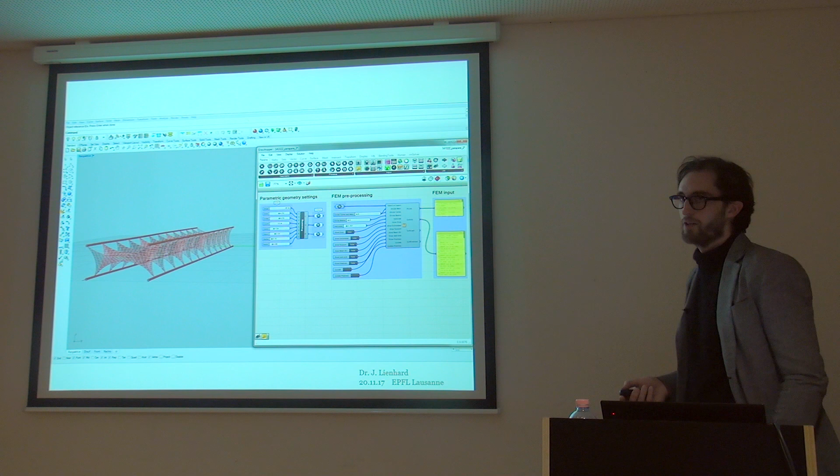The computational means that we now have in these parametric tools actually make this possible also at a distance to the architect, who may be somewhere totally different in the world, where we can then set up a model that creates both the architectural model and the FEM model. And this gives us the chance to quickly iterate through different design ideas and then set up an efficient system.

Let me see how I can start this video.

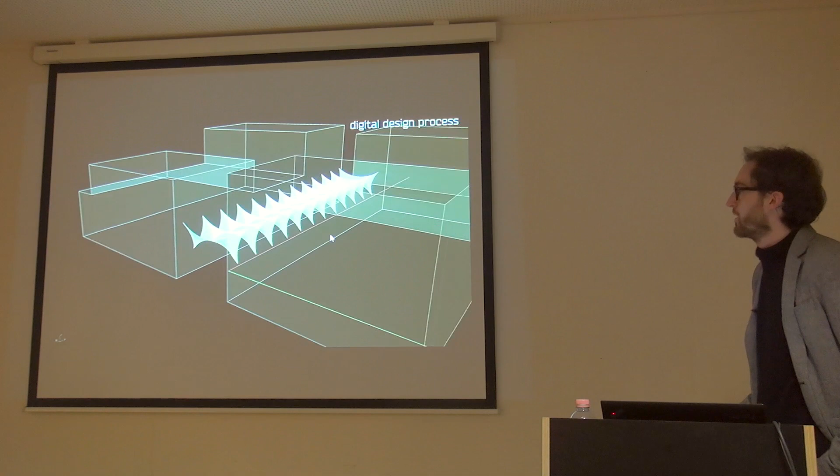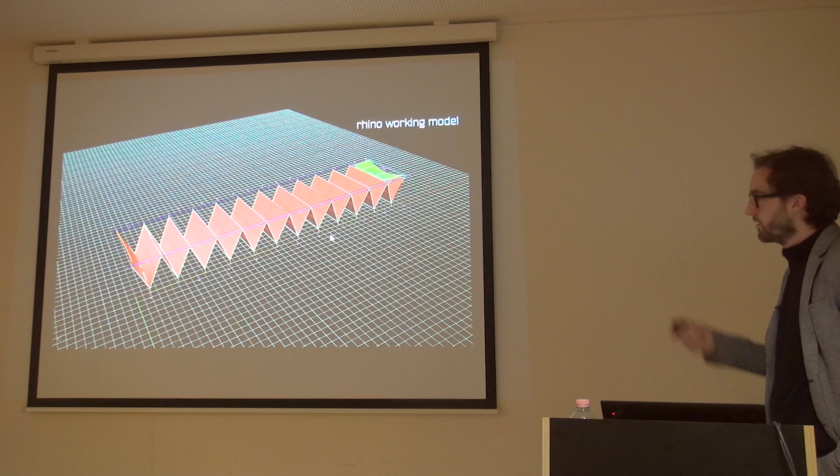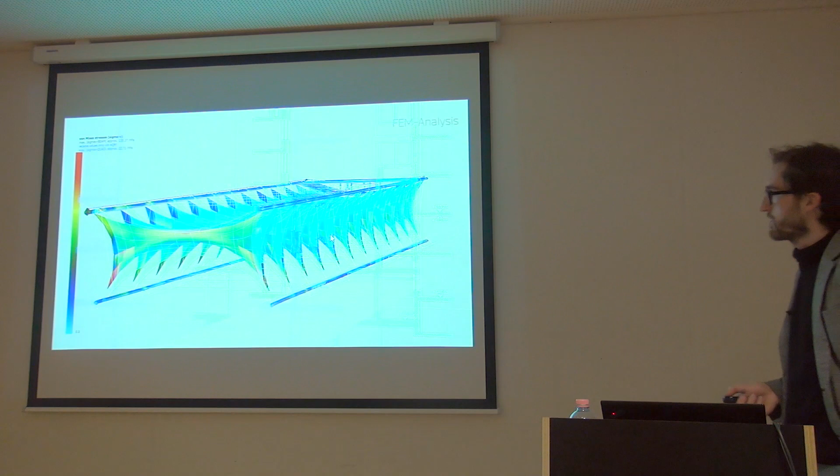So this is a convertible shading structure here in Switzerland, in Buchs, a small town north of Chur. And they have this central shopping road, pedestrian road, Metzergasse, 54 meters span, 12 meters wide, and they wanted a convertible roof in it. The big challenge was that some of the existing structures are quite old, some of them are newly built. So every point where we were connecting the structure to the building had to be individually designed. And so the design iterations that we had to undergo were mainly optimizing these support reactions here and finding a kind of minimal solution for that.

In terms of the kinematics of the system, often when you build a retractable membrane, you divide the problem into several different driving systems. So you have one driving system which can travel fast at a low force, and then at the end you grab the membrane for the final pre-stressing with a different driving system that covers a short distance at a very high force. And this is essentially what makes convertible membrane structures extremely expensive, because of the mechanics involved in it.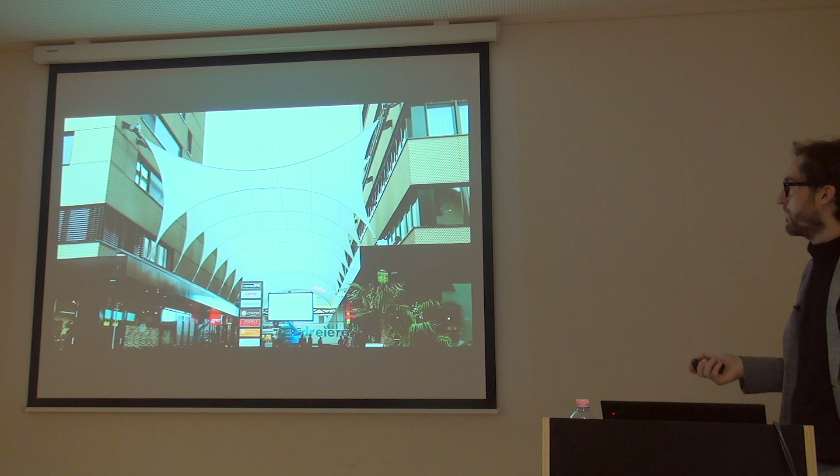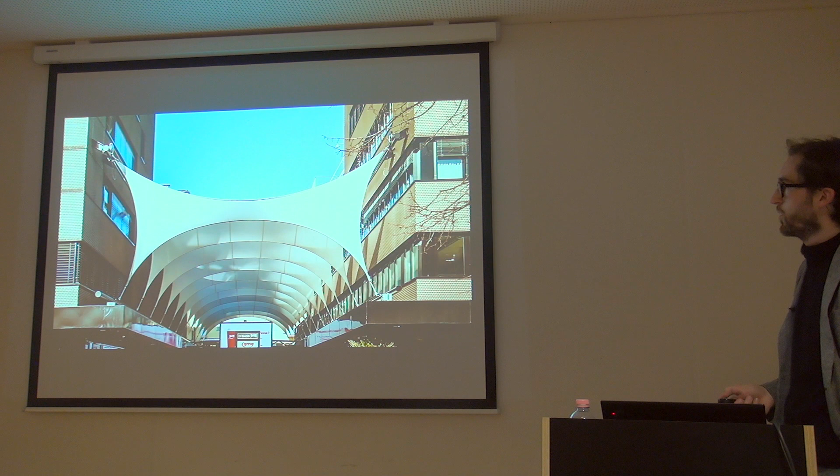For this project, we actually succeeded in designing a system that is solely driven by a single motor drive in the back of the structure, with a cable system that only pulls the front edge of the membrane, and then here is that central driving system that pulls it. And this was possible because we connected the membrane on the sides to sledges that sit on these rails, which have an extremely low friction.

And these are actually designed for robots in heavy car industry. And some of these rails are actually designed to be put outside. And because of this extremely low friction that we have on here, it was enough to pull only the very first corner plate of it and have all the other corner points passively travel along.

So in here, this whole game of equilibrating forces and having the resultants perfectly point perpendicular to the rail was obviously a very important aspect, because any force that is at a slight angle to the rail, the sledge will simply pull aside. And if you don't design it carefully and the sledge pulls aside, it basically just means that you get big wrinkles in the membrane because it finds a different equilibrium configuration which it was not designed for.

Another challenge, and this is what I meant, that sometimes the things that we explore at university come into practice at a very deep, detailed moment, is the way we tensioned the membrane here at the corner plate. Normally you'd get a laser cut plate here and some pulley systems to adjust the length, and maybe some hinges in the back here to control that all the moments are free.

And we wanted actually this very pointy corner here, and we're not very happy with the early designs of the system. So what we did is, well, let's actually just build a material spring here. So what we did is we analyzed the elasticity of the belts that we could connect it with. And what was very important here is that the properties of this belt will hugely change as you're sewing it.

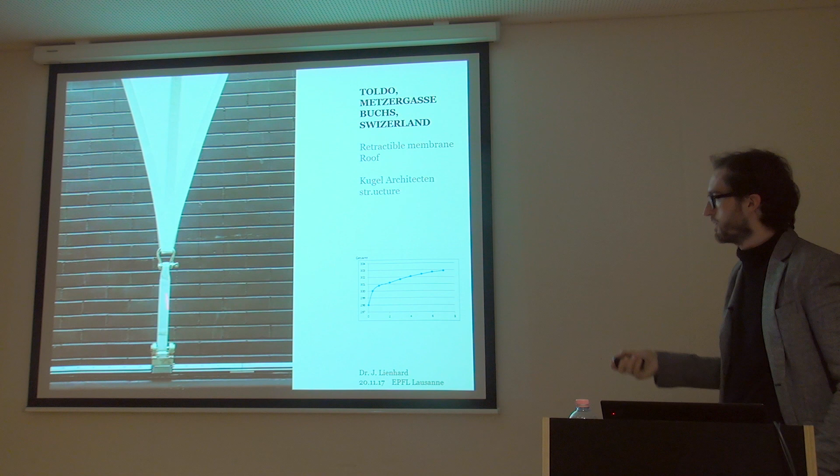So we had to run several tests of how to sew this belt in multi-layers wrapped in membrane so it's UV protected, and understand the exact elastic behavior so we could design the length of the belt to become the spring connection and the kind of pre-stressing bit of that corner plate. So that at the end of the day we have these very pointy and only membrane material corners.

And this is again what I was mentioning earlier on. As you're walking past this roof now, your eye does not get stuck on a bit of mechanical detailing, but it's something that looks rather obvious, and that is actually what we were particularly aiming for.

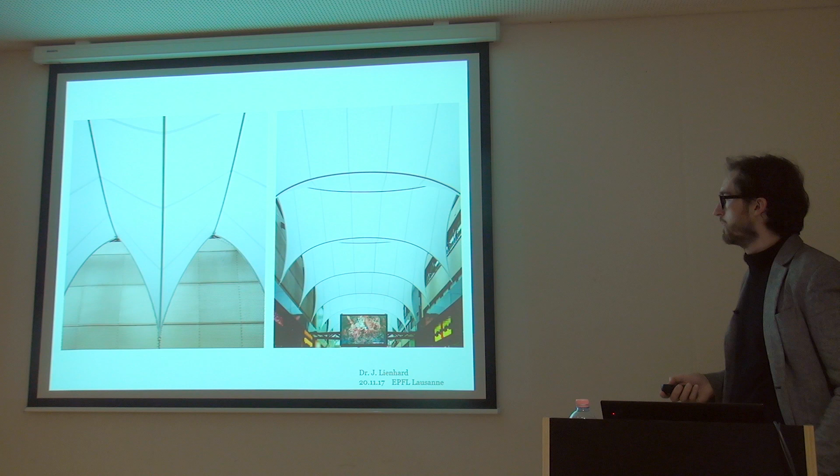The last project I want to share is a project which we recently built in the east of Germany, which kind of talks a little bit about the challenges that we meet today, which are an outcome of the design tools that we're using. And we found that because of the means that we have to create complex geometries in our CAD models, to build a grid shell which is totally individual at every node and beam length and the orientations of the nodes, even creating something that goes from 7 nodes here to 6 and sometimes 5 nodes. So everything is different in this grid shell.

And we also see that as a structural engineer, once you get a 3D CAD model, it's actually very fast to create a 3D FEM model and analyze the system without realizing what challenges might come in later as we're detailing it. And this is kind of what happened with this project, that it was designed and put into tender, and it was realized that the individual shape of every node and the way this was designed became a challenge for the steel manufacturing. Obviously there's many solutions to design nodes like that, but the initial price idea for this project did not allow for these more sophisticated solutions with milled joints as we usually see them in these grid shells today.

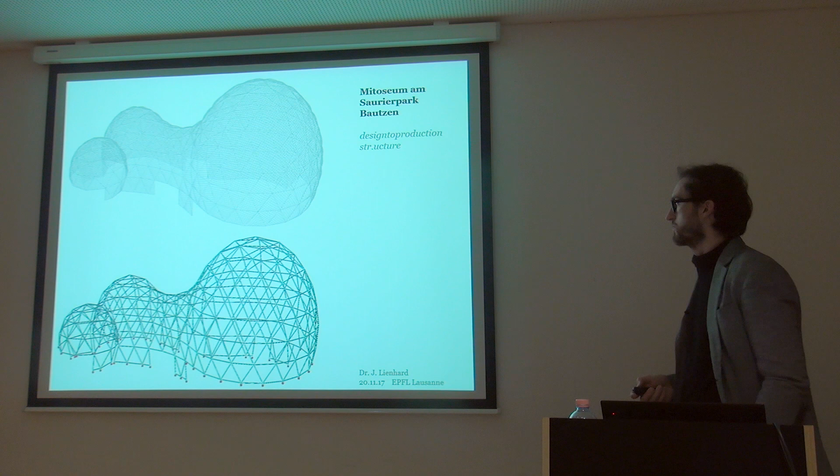So we came into this project with a suggestion that we can break down the node into 2D laser cut steel plates, which we developed together with Arnold Walz from Stuttgart from the office Design to Production, and basically followed the idea that we have just these swords that sit at the end of the tubes and 2 plates which give the entire different information about the geometry of the system. So you can imagine that you can control the angle of the pipes with the way they're slotted into these head plates, and that you can control the angle of the shell itself by changing the angle of the sword here.

And then as you start doing this, you also realize that as we have these steel plates anyway on the laser cutting machine, we can also use the laser to write additional information onto that piece of steel, so that we can at the end of the day totally avoid shop drawings in the entire system, which will then make it a lot cheaper than any other standard system.

So what we ended up with is a node that only has 1 bolt, whereas the initial design had steel swords with 8 bolts per connection. We have an enormous structural height at the node, so the overall weight could go down, and we totally avoided shop drawings. And the steel manufacturer did not have to build templates which he would slot into the connection to control the way he would weld it. Because the only bit of welding he has to do is at the back here, which is a very simple weld.

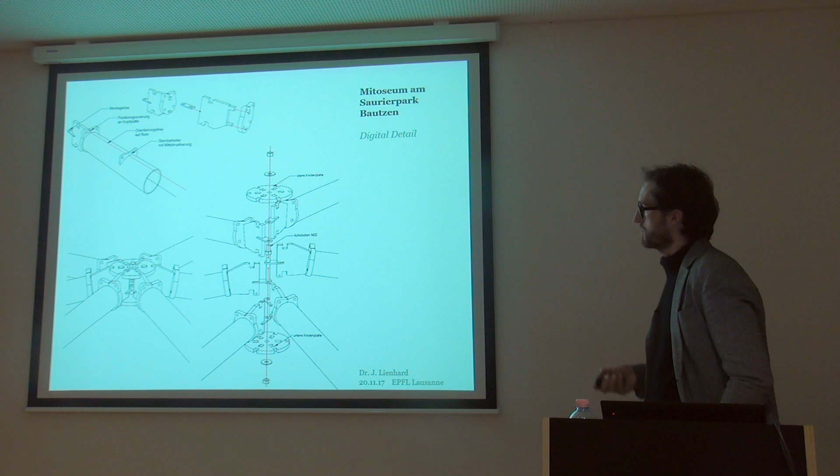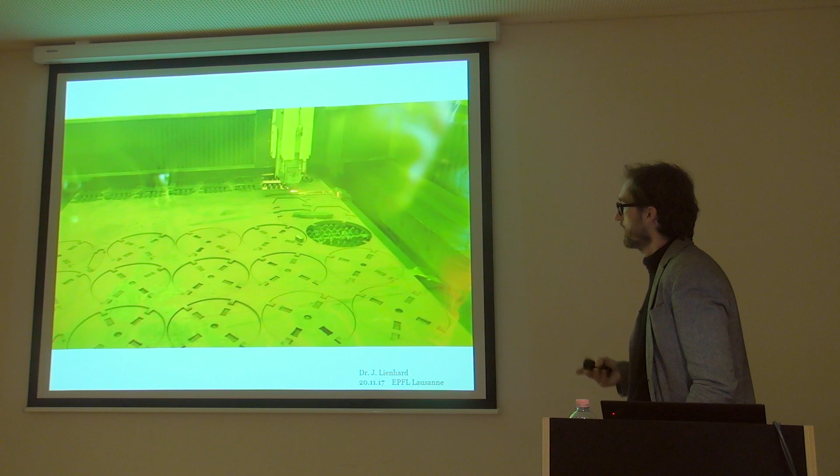Another challenge then is the actual laser cutting, because we're now cutting very thick plates up to 25 millimeters, which only works at the precision that we need in these slotted holes with edge cooling. So there's also a process of understanding how this can actually be manufactured to the precision that is needed. And in terms of the engineering and the material behavior of steel in such a connection, we actually faced a totally new challenge as well, because this form-fit steel connection that we have here is something that is not covered by the general design codes that we work with.

What is quite nice, though, is that the Eurocode allows us to design steel connections based on complex FEM modeling. Part of it says actually that you have to prove that you have modeled complex connections before. And so we could set up these models where we actually simulated very precisely how there are these frictionless contacts in these form-fit connections of these slotted holes. And we could only make it efficient in terms of the plate thickness if we allowed a large amount of plastification of the system under its maximum loads.

So in order to not do this for every single connection of the system, which would have meant it would be very inefficient again, we then classified different parts of the structure and found an analytical way to calculate this slotted connection, which could then cover the entire system, and then we would only pick out the maximum utilized nodes to run a complex analysis on.

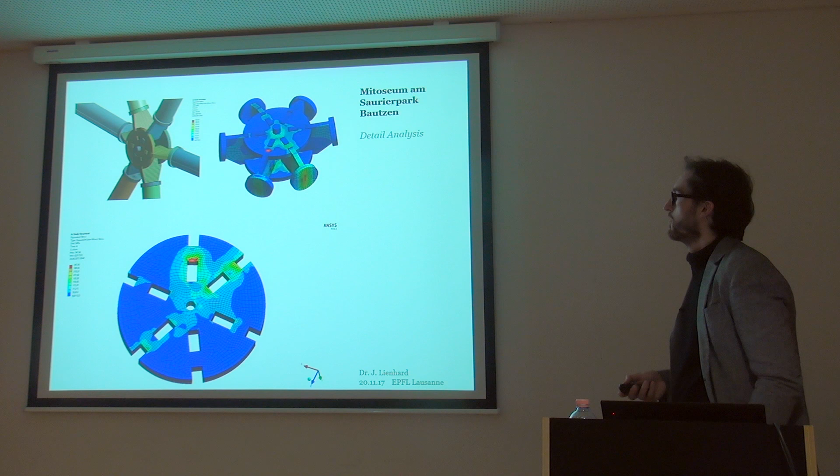This is where you can see a bit how the system was then translated into a 2D map, where we could classify different force categories, which would then decide on plate thicknesses, and we would always pick the maximum node from one of these classes to simulate precisely.

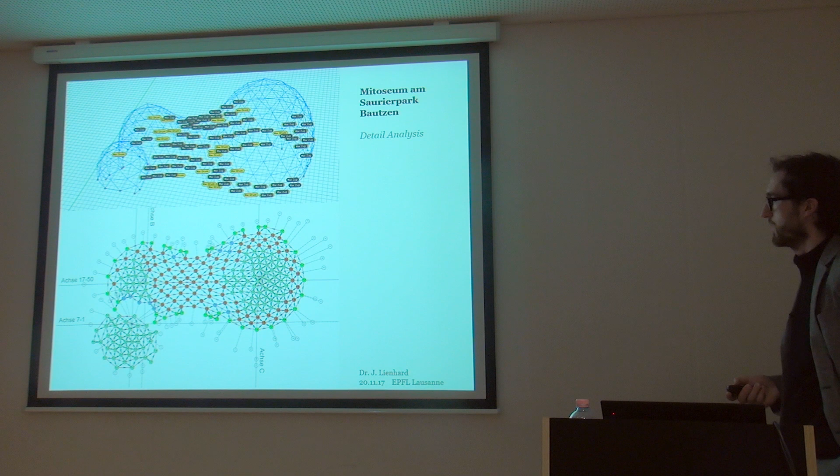The next challenge then is to actually not just think about its manufacturing, but also think about the erection of the system. So what we did here is we designed the node with a little hole of that cocked connection sticking out, and there's a little temporary pin that's set through here. And the connection was actually designed in a way that the longest beam in a horizontal configuration can freely cantilever off of this plate.

This is only possible because it's a perfect form fit of this cocked connection, temporarily held by this little pin, which then made it possible that actually only 2 or 3 people at the time erected that entire system. Because there was one guy organizing the steel parts, the other one shifting it up, and this guy could all by himself connect this entire system. And whenever an entire ring was closed, they set the outside plate on it, and the structure was set in its final position.

You can also see here, if you look at some of the points, when you program such a system, you always have to think about the most extreme cases, because there's nothing more frustrating than perfectly programming the round plate and it working for 98% of the structure, and then you're stuck hand designing these positions where the round plate doesn't work anymore. So it still happens that some of the corners cannot be automatically generated, but you will find that you can spend just as much time resolving situations like this than actually resolving the entire system.

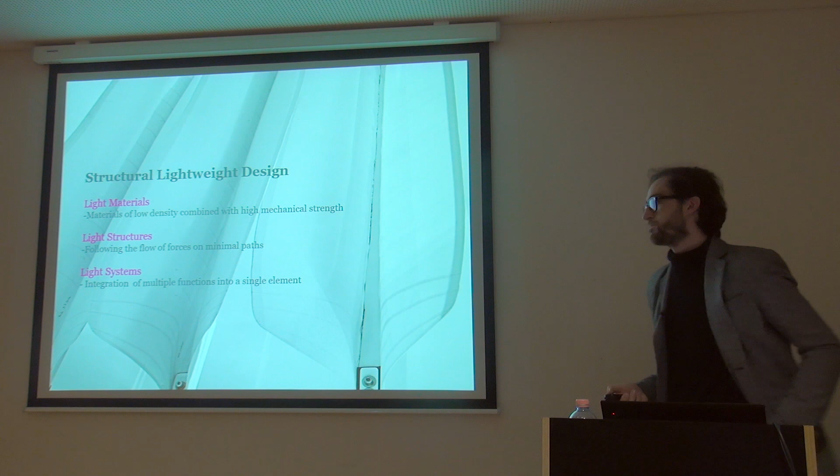And if you look into nature, we recently published a guideline in the German Engineering Club about biomimetic buildings. And in this guideline, we published these basic approaches that you also find in biology, where you see that a lot of natural systems rely on heterogeneity, on anisotropy in material, on hierarchical systems, multifunctionality, redundancy of systems, and adaptability.

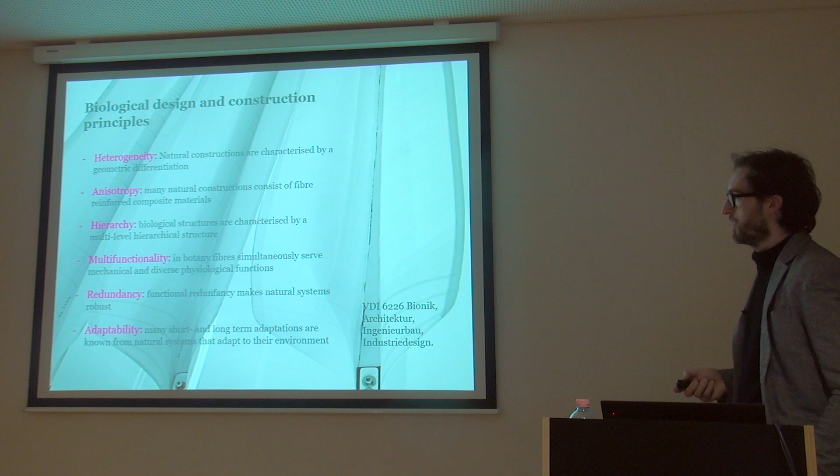And now if you actually put these two side to side, you actually see that what we do and the rules that we follow in lightweight systems are actually seen as ways that evolution has brought up in nature. So light materials and anisotropic materials are actually something that often go hand in hand. And we see that the structures, as they become light, they often rely on hierarchical systems, and they can be very heterogeneous in the way they resolve problems. And the aspect of light systems often relies on multifunctionality of the system and on its adaptability.

This is what I want to conclude with, and I hope that the film of Otto will maybe give you more of an idea of what the Stuttgart thinking of engineering and architecture as a dialogue has brought up in the recent years. Thank you.